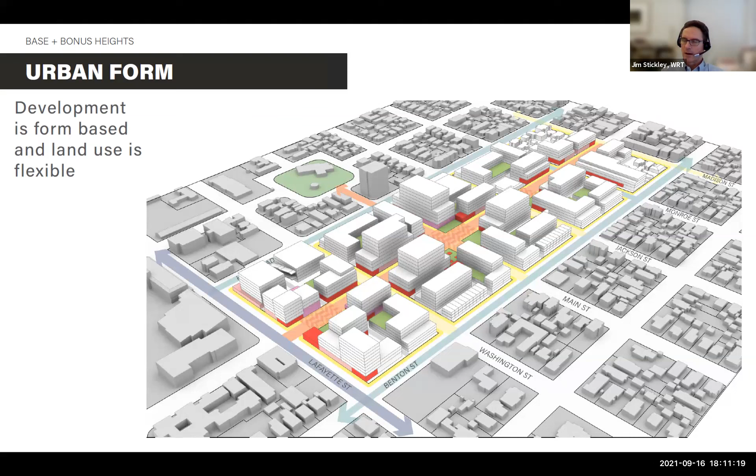So this diagram represents the height allowances that we all worked on together, made lots of refinements through our process, and approved in the session where everyone signed off on the framework plan. And as we looked at this in more detail and became familiar with the Surplus Lands Act, the desire to use density bonuses in a couple of different ways to get community benefits, but also looking at the state regulations of allowable density bonus on affordable housing, we tried to carefully look at these height allowances in the context of those influences. And so those are summarized briefly on this slide.

And so what we developed, if you go to the next slide, is a way to where we have a sort of a base height allowance that achieves the feasibility goals that we had all gone over together. So for the 2 different kinds of land uses, the housing and the office, which would be the predominant land uses. If you flip the slide, there are certain thresholds of feasibility.

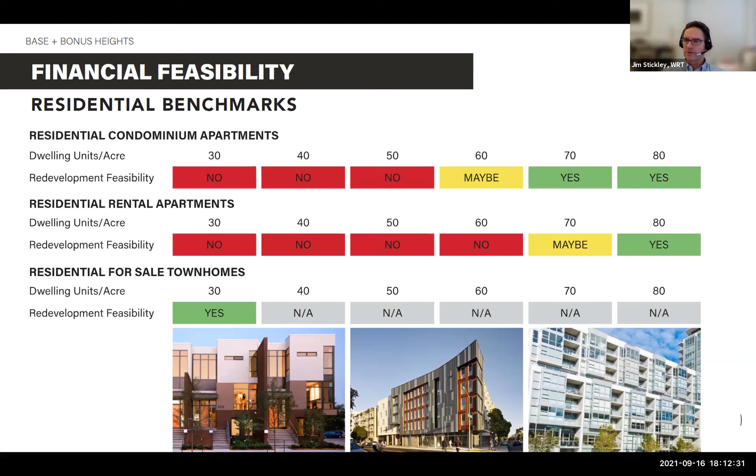And I think you remember these charts here that show where we start to get a maybe in feasibility and where we get stronger feasibility in the yes categories. So the feasibility really starts getting stronger on the residential side with 60 units to the acre, and then gets stronger as you go up to 70 and 80. And then in the next slide with office, the feasibility starts getting stronger at 4 and 5 FAR, and then gets significantly stronger above 5.

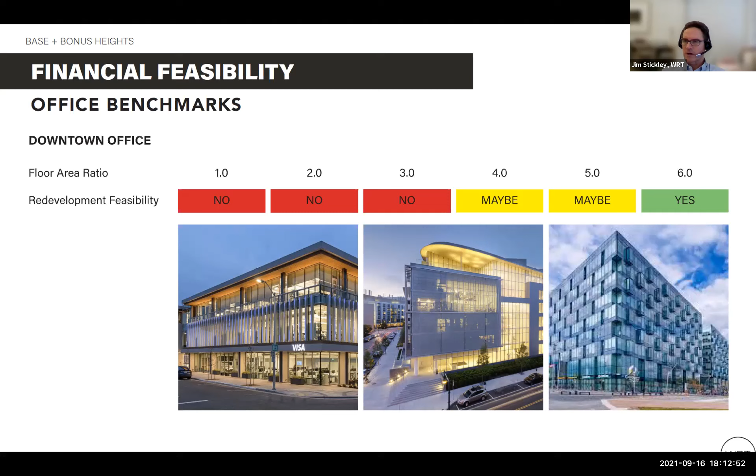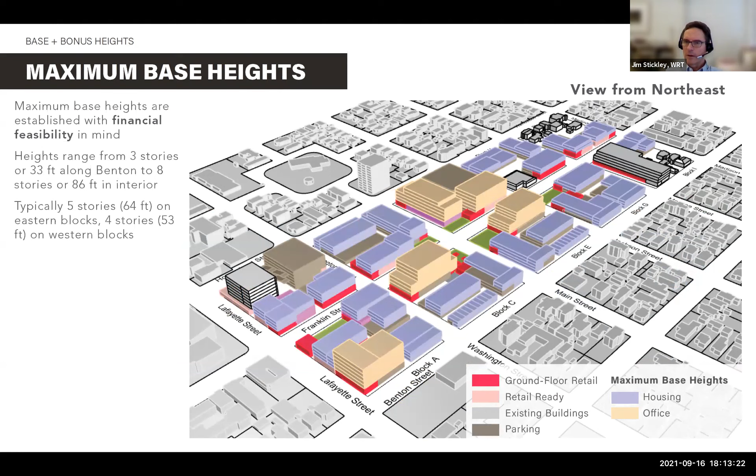So we're still trying to honor those thresholds in setting the base height, and that's what this diagram represents. So these are all shorter than what we all looked at a couple of months ago, but they represent the minimum height of a building that would still achieve the economic feasibility as analyzed by our economists. And then to that, we add additional levels that represent the bonus heights.

And so that's what this additional color is here. So you can see on most of the residential buildings, that's represented as the yellow floors. And again, our land use or our plan is going to be agnostic, as we've always said, to land use. So this is more a view of what may be probable land uses rather than land uses that are dictated by the plan. But in those areas where residential is probable, we're showing bonus heights of 3 additional floors, and that's in keeping with the state allowances for affordable housing projects. And it typically calculates out to 3 additional floors or an additional 80% of that building's residential unit yields. So that's what's represented by the yellow floors.

And then on the probable office buildings, which are the tan buildings, the bonus heights are represented by the darker terracotta color, which is generally depicted as 3 additional levels to those office buildings. So we were, I think, pretty happy with the way that this worked out, that we can address the allowance of bonus density and still keep it within the height limits that we all looked at together. And I think where it facilitates the building of affordable housing where that is likely to happen, so that might be on the city-owned parcels.

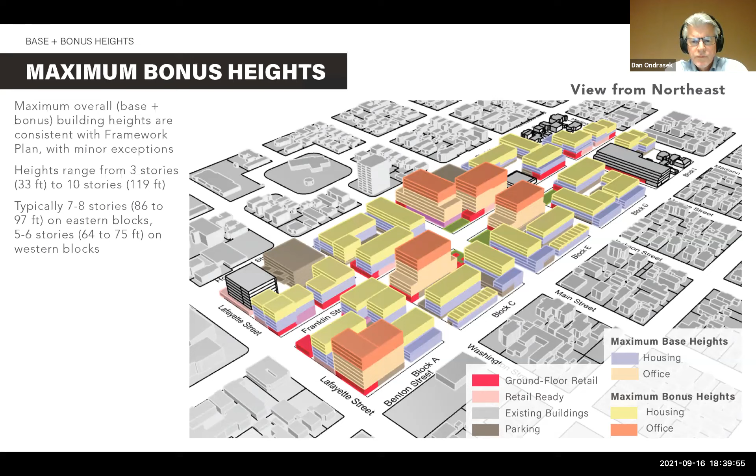Right, okay, that's the one that David showed the other night, the radial road pattern leading to downtown. That one would work well with that because it's visible from a lot of different angles. It could be a fairly slender thing, because you could have something quite tall there, and if it's fairly slender, it might shade your house, but for only 35 minutes, because the sun keeps moving.

So let's segue to the solar. I think these are... did someone have a question? I had one that you guys brought up earlier in the conversation, and that is that this is the precise plan bonuses, but the state bonus goes as well as this. They can stack, is that correct?

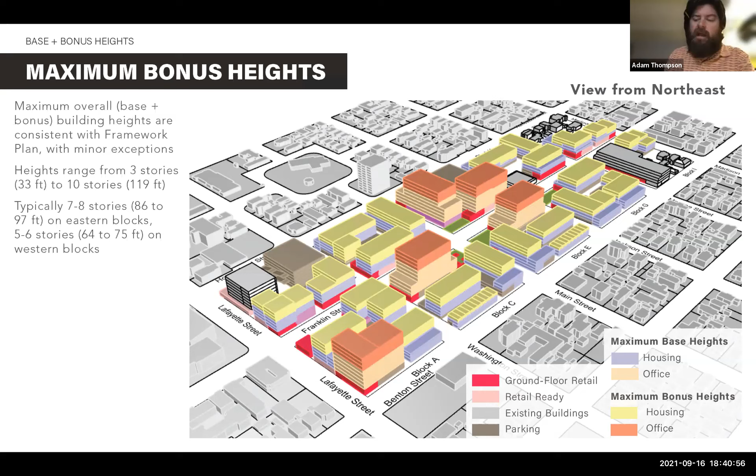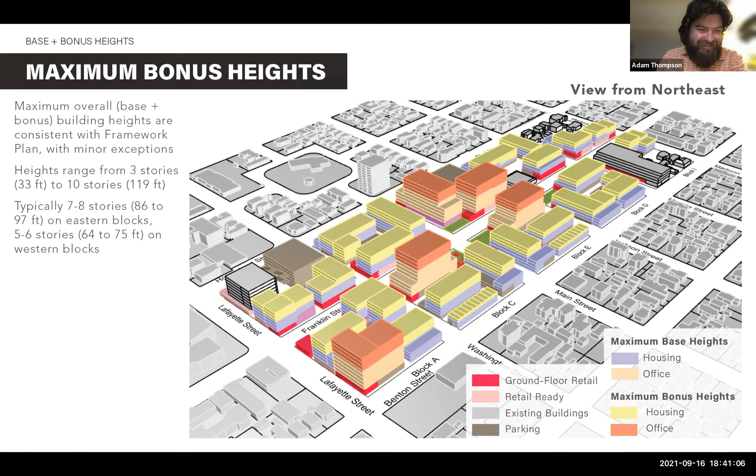Basically, I think the way these have worked in other cities, the developer gets to pick one or the other. I just wanted to make sure I heard it correctly, because I'm sure a lot of other people would want to make sure that there's no stacking. Of course. We tried to have everything fit within the heights that we all settled on.

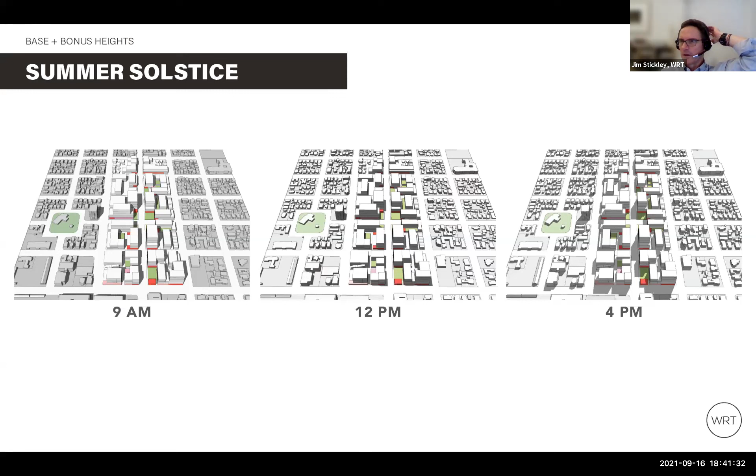This is with the scheme that we've all been looking at. And then the spring equinox, at 9 a.m. you start to get a tiny bit of shading down here at Benton and Lafayette, but otherwise we're in pretty good shape. That building we're shading is a one-story commercial building, so not a huge concern there.

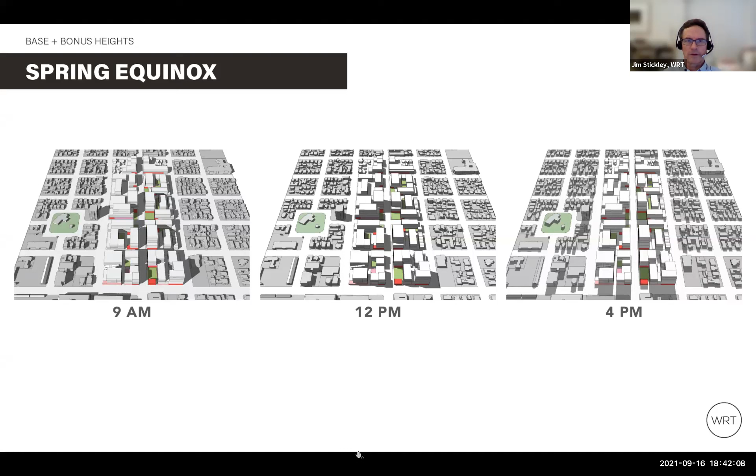Going to the next slide, this is the winter solstice. Here's where we start to have some issues. At 9 a.m. is where the problem is, so really from maybe 8 to 9 o'clock we are getting some shading along Benton, but not complete shading. You can see there are still some homes in the sun, their front yards might be shaded, but certain homes are shaded by these buildings.

It'd be important to understand from what time to what time. From 7 to 9, and for a period of maybe a couple of months on either side of December 21st. But on the other hand, they would generally be sunny from 9 in the morning to 4:30 in the afternoon, which is a lot of sun.

Some of this is going to depend on what the sensitivity is with the community, but you can see on this corner building at Benton and Lafayette, the shadow actually casts all the way to the next street, and that could be of concern. So we noted that. At 12 o'clock and 4 p.m. we're good to go, so it's really a morning problem, an early morning problem, exactly.

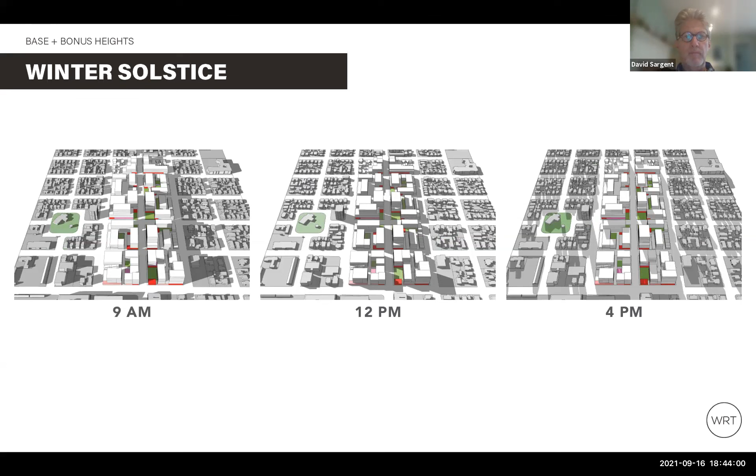So the culprits are this corner building that we talked about at Benton and Lafayette, but also these two taller buildings on the north side of Franklin, what we've been referring to as the office buildings. Both of those are casting shadow on some of the houses across Benton.

So we looked at that and looked at what height adjustments essentially for those three buildings. There's a little bit of an adjustment to one of the mid-block residential buildings, but I think it's one floor of adjustment, so pretty minor on that one.

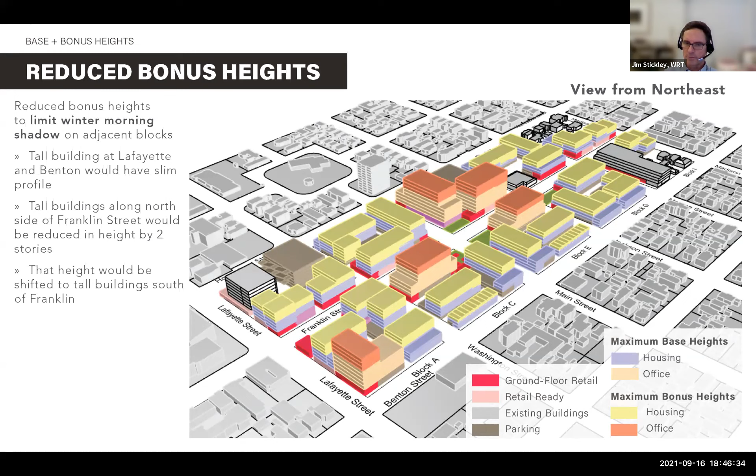So it's really those three tall buildings are the major changes. And then if you just flip a couple more times, Peter, on that mid-block residential, you can see that those also are just, and it's actually just one of them that's slightly adjusting.

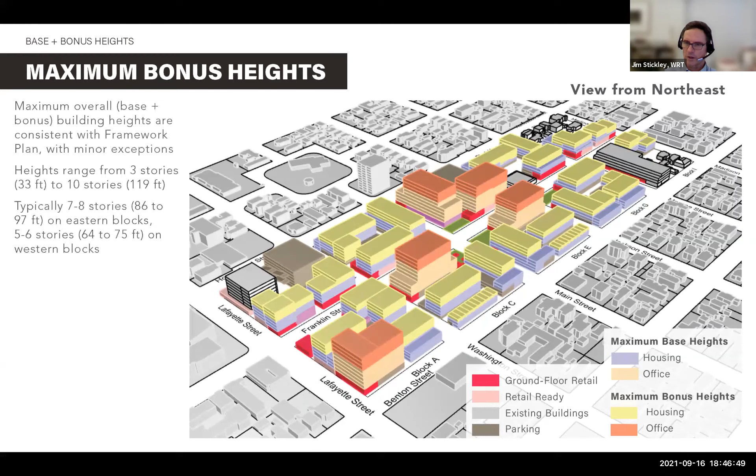And there's still some front yards shaded, but as David says, this is for a couple of hours in the morning during a couple of months in the dead of winter. So we don't want to overblow the problem, but we also want to make sure that we're not going to be presenting something that is going to be shocking to the neighbors.

So that's really our recommendation, is to make those changes. It does reduce the capacity of the plan some, not significantly. In the next section, we're going to talk about capacity, because we want to tell you about our approach to caps on certain land uses, and at the same time quantify the amount of capacity we're losing with these changes. But our general feeling is that it's still quite a robust plan in terms of the capacity we're providing, and that this is a relatively minor change, something that probably buys you some goodwill with the neighbors. So are there any questions on that before we move to the capacity portion?

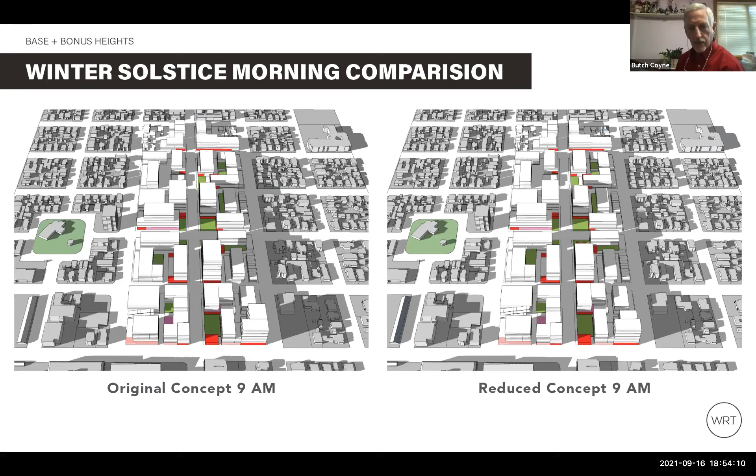Butch, did you have another comment? Yes, I did. This is kind of going off on a tangent, and maybe this isn't the appropriate time, but I had the opportunity when I was in Indianapolis to work with the rebuilding of the downtown there. They started playing with the height of buildings on the main drag. So my question is not having to do with the sun, but having to do with wind.

One of the issues is once the downtown was built in Indianapolis, it created substantial wind tunnels because additional height was added to the buildings. Is this anything we would need to be concerned about, especially on Franklin Street, with the way we create the tunnel the higher we go?

I don't know, it's a good question. It's not something that we've studied to any depth, but it's a great question. So we had the same issue in San Jose when we built the Rep Theater on the Paseo. The way we positioned it, we didn't do a wind study on it, and it created a wind tunnel on the Paseo next to the Hammer Theater, which is there too. So again, might be something we want to take a look at, because the last thing we want to do is create those wind tunnels at certain parts of the day.

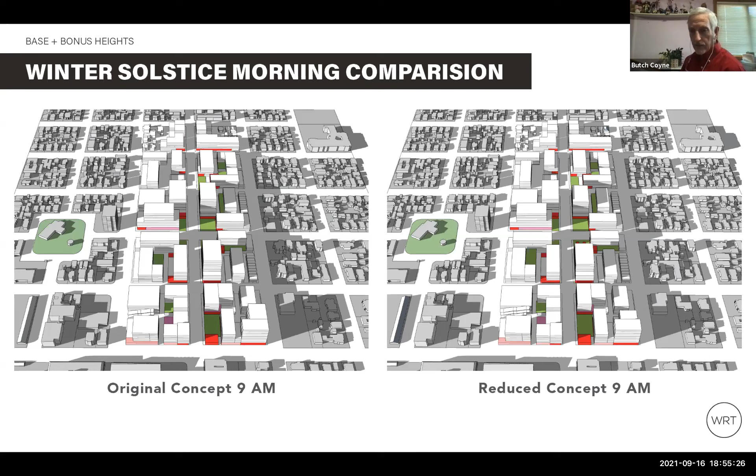We know how the wind picks up around 4 or 5 in the afternoon. Again, I have no expertise in it, but the taller we go with those buildings, what are we creating when it comes to wind patterns? Very good point, Butch. I think we do have some opportunity in the EIR process to look at wind effect. So that's a really good point, and something to pursue.

All right, great. Well, I don't... Tisha, is your hand up? Okay, no worries, sorry Jim. Okay, let's keep pushing on.

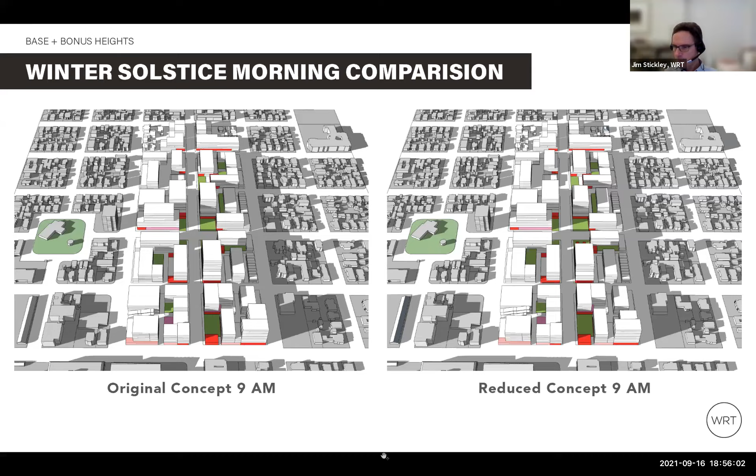I think we want to leave an hour if possible for the form-based code piece of this. So Peter, why don't you go ahead with this part?

Sure. So we were beginning to look at how much development this model enables, and how the plan should regulate that amount of development. Starting again with the assumptions we've looked at together numerous times, which underlie some of these development findings. Here we're comparing the original concept with this reduced concept, meaning reduced heights in certain locations in order to preserve solar access to those houses.

I want to first focus on just line by line, not so much comparison, but looking across the table. Looking at the original concept, the model we've looked at together would enable about 1.6 million square feet of development as a base, without any of the community benefits, and an additional 850,000 square feet of development were those bonuses to be realized. So total development capacity of about 2.4 to 2.5 million square feet.

Broken down by land use—and again, we don't want the plan to be dictating land use to this extent—but were the model to be developed, that would result in 884 units in the base, plus an additional 700 units of bonus, for a total of approximately 1,600 units.

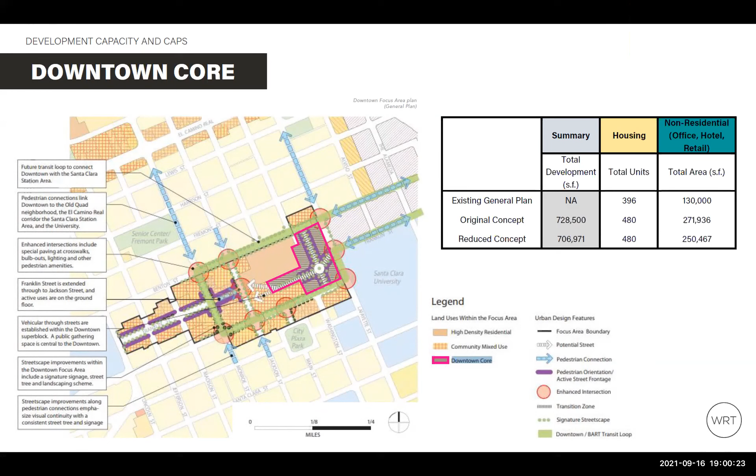Just a quick thing—it's not 100,000, it's 1 million. A million? Oh come on, that sounds better. That sounds more scary. 100,000 seemed really low to me. No, I'm sorry—how many parking spaces did you say? 2,900, so it's about a million. 350 per space. Oh, Jesus, I'm so sorry, thank you. Yeah, that seemed low to me. Power of 10, power of 10. Can you just, Peter... cars are big. Sorry.

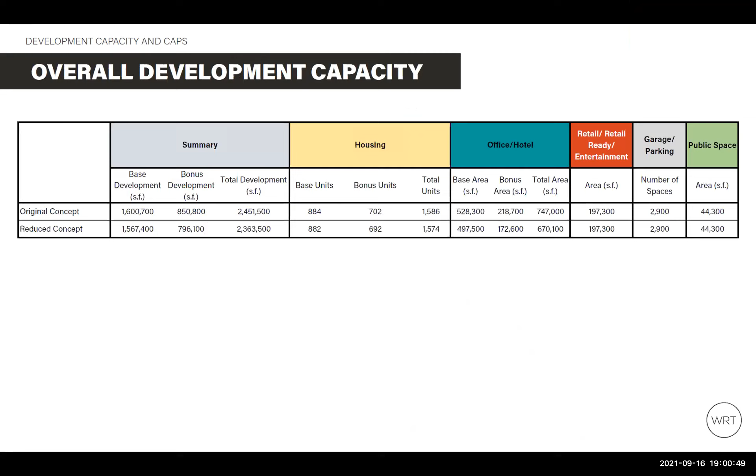Jump back real quick, Peter? So roughly 1/3 of the total developed space is parking. The general rule of thumb on office is that it's the same square footage of office surface area to office parking. If you imagine an office building in that volume, usually to park that, you would require the same volume building right next to it. Most people don't realize that, and it's quite a shocking comparison. If you're looking at 3 cars per 1,000, that's what it actually works out to be.

Now, our ratios are lower, as David said. We're using 2 spaces per 1,000 for the office because of transit proximity and sharing and a lot of other things. So our volume comparison would be less, but just as a general rule of thumb, that's what it is. It's shocking.

I just wanted to bring it up because for everybody who watches this video and the public as well. That's why we need transit right there. That's why we need it. It's right so down close to Benton. All you got to do is get to it.

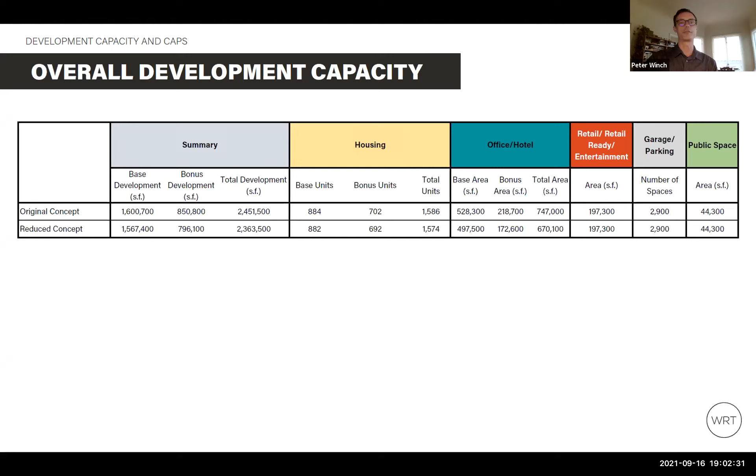I think the reduced concept, we would naturally assume a reduction in the parking to correspond with the reduction in office space as well. We didn't catch that, but it would. Good point. It's not going to make that much of a difference. Just a quick comparison, thank you Peter, appreciate it.

So the downtown core is a land use designation in the city's current general plan, outlined here in pink, and is this strange organism which takes in most of the city-owned properties on blocks A and B, and on block D. Actually, all of the city-owned property, as well as the property on the corner of Benton and Lafayette.

So the current general plan states that there's a capacity in that pink area for 130,000 square feet of non-residential development and 396 housing units. And our concept, our original concept with base and bonus would raise that to 480 units and about 270,000 square feet of non-residential development. And then the reduced concept would just reduce that because that hotel tower is more slim.

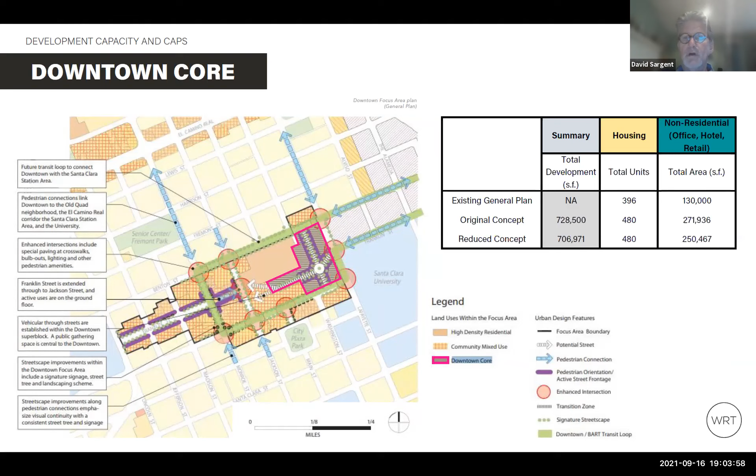We're losing about 20,000 square feet in that area. And if, as could happen, less office ends up being attracted to here, then it would just go to housing. So if the office dropped significantly, the housing could increase very significantly.

So that's a good segue to this idea of caps. Our proposal here is that the model that we've been working with should be considered the sort of housing maximum model. That this is, if we want a 24-hour, 7-day-a-week downtown that has a mixture of activity and uses, we wouldn't want much more housing than this. We'd want about this much non-residential development to be mixed in. So we're calling this the housing maximum.

And I think this is something that we should discuss together, because we haven't yet had a chance to discuss this. So that relative, sort of what is the right amount of elasticity between housing and office primary uses, I think is where we're at right now. And this also can be called the office minimum. Yes, and I think it would be better to call it office minimum.

Because the housing that you're mentioning, those 1,586 units, is based on an understanding of how many gross square feet of building would be devoted to housing. If the average unit size for apartments was 750 or 800 instead of 900, you'd have a lot more units. So this is a good point. And if you had a lot fewer townhouses, or if the townhouses were less than 2,000 square feet, you'd have a lot more units.

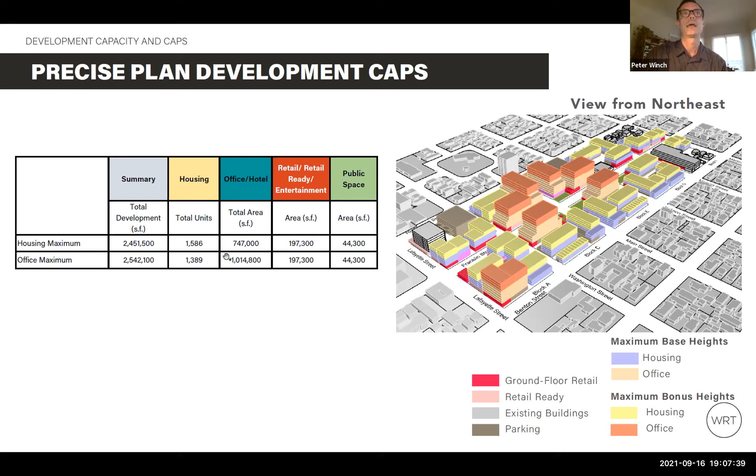So then we go to a second scenario where we're imagining we get a bit more office. Peter, just so everybody saw that change, flip back and forth. Everybody can see where we've added two office buildings. Now this would change the numbers a bit, so we get higher square footage in the office column and fewer housing units.

What we're suggesting is that the plan would set caps in multiple categories: a cap of overall development in this summary column, let's say about 2.5 million square feet. It would set a cap of square feet in the housing category, not units, corresponding to our housing maximum model. And it would set a cap of office square feet corresponding to the office maximum.

But you can see these two numbers aren't going to add up to the overall cap — that would be too much, so you can't get all of it. But you can max out one or the other, not both, while staying within the overall cap. That's a good way to approach it, and we'd also keep the ethic of not mandating where the buildings go. Just because we've modeled these two outcomes doesn't mean that's exactly where the buildings will land — it's just the right proportion.

We think somewhere in that range is the right mix of office, hotel, and housing. And if it turns out in 10 or 15 years that the market is just stubborn, that's why plans can be amended. If it turns out all we're getting is residential, they reach the residential cap, there's no office, and that's not what we want to have happen, but you don't want the rest of it to just stay vacant.

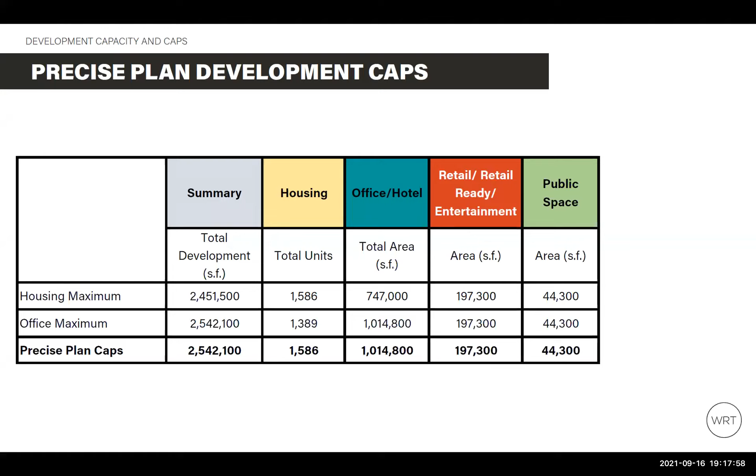Anna: Hi guys, there's a couple trends going on recently that may impact the attraction for office in our downtown. One is remote work—people are choosing to work for companies who allow them to work out of state or remotely, which may make office look less attractive. The other thing happening right now is a tax on headcount. I know Google got hit pretty hard in Mountain View with this, in the millions of dollars. So companies thinking about office space may now be trying to reduce headcount as well. All of this is happening post-COVID, so it may make office look less attractive downtown for other companies or developers.

Yeah, I wouldn't want to be an office developer this year. No. Atisha, is your hand still up? We're good? Sorry, yep, no problem. All right, I think we can continue on, Peter.

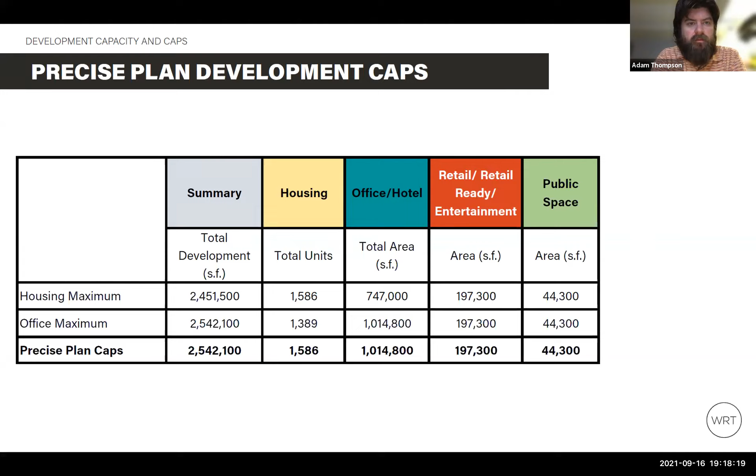Okay, and Jim? So the last topic, I think, is just one slide here, acknowledging that we haven't looked closely at these single-family houses that exist on the westernmost blocks in our district. We haven't given them a lot of attention as a group. So I think we need to discuss what our stance is, what the plan's stance is toward these houses.

I think what the model is doing is expressing an intention that those buildings can remain—that the plan includes development standards and perhaps incentives that work toward those buildings remaining. But I think that could be done in a variety of ways. One way could be to enable development at the same scale we'd be enabling along Benton, which is townhome scale designed to step down to neighboring buildings, but to create incentives for that development capacity to be used instead on neighboring sites.

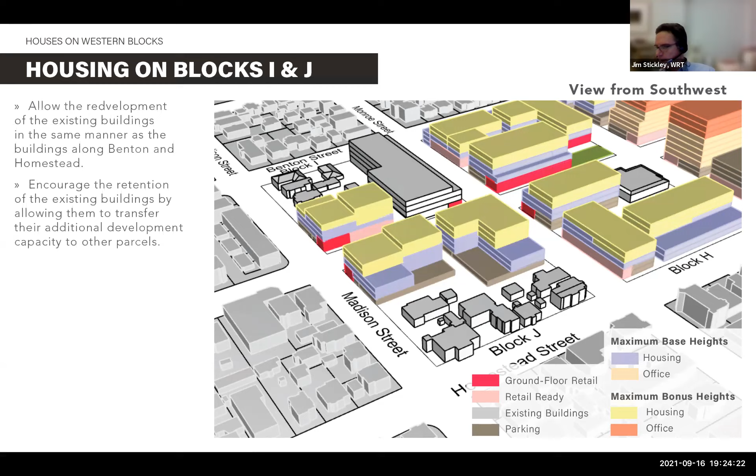Okay, we'll give some more thought to that, but that's helpful. That's sort of the general spirit of where we want to go with that area. Great, so I think that ends the first piece.

David, do you want to take over the share screen? Before you do that, I just wanted to let the task force know that we are taking this plan to the council on September 28th for their acceptance. That will include the development capacities, which will set what we're going to use to start our environmental impact report and move forward through the process. So again, this will be going on the 28th of September to council for their acceptance.

And before it goes to them, can we clarify the business about the square footage versus dwelling unit counts? Yes, great, thank you.

Leslie, to reiterate what we talked about, if everybody feels comfortable with these height adjustments to address the solar, we wouldn't really raise that as an issue with council. We would simply present the plan that we and the task force have worked and settled on. That's sort of the approach we talked about, rather than saying here's the plan that we developed, and then here's the height adjustments that we made later. I don't think that level of detail is needed. Just present the reduced heights plan as the plan.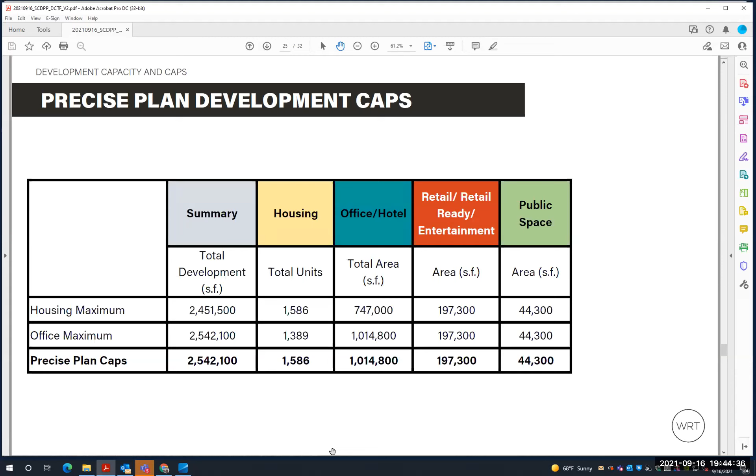Are we going to do a lot of redevelopment? The historic nature of the downtown and some of the homes within it, including the Cole House on the corner of Homestead and Monroe, are really important to the community. Preserving both the historic context of the homes and the homes themselves are important. So what is it about this plan that actually guarantees protections for historic homes, both within the downtown plan itself and the homes surrounding the downtown, where we do have plenty of those? Thank you.

Thank you, Jonathan. So can we answer that now? I think, just briefly, this plan focuses on these specific blocks. So if there need to be mechanisms to protect historic fabric in surrounding blocks, that would need to be the subject of another plan or a general plan amendment. I think this plan can only affect the blocks that are within this plan area.

With regard to the historic homes within this plan area, the ones we're seeing on Block I and J, I think the spirit of the question is exactly what we were talking about before—how do we place incentives in the plan that would encourage these homes to be retained as part of the fabric, and allow them to transfer their development rights to other parts of downtown where we want that density.

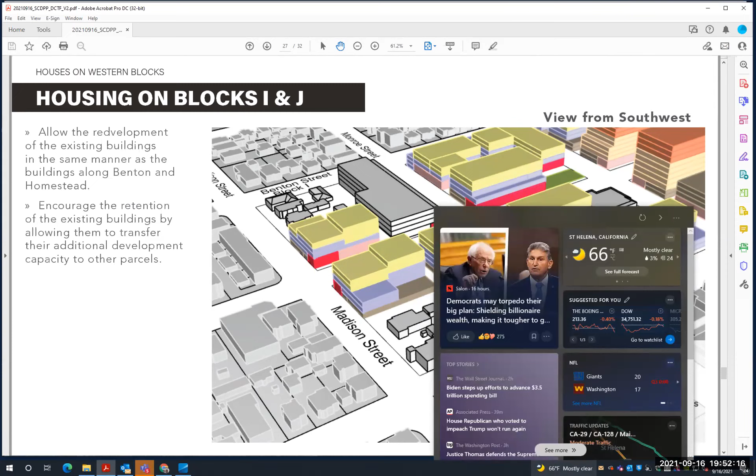I agree. I think the whole point of the form-based code was, well, what was intriguing for me, especially being an HLC person, is that we can put that language in there and it can be strong. And so that's what I'm banking on with this form-based code, those levels of protection. I heard that at the joint committee meeting, so I'm a believer, and I really want that included in this whole form-based code. That's why I'd buy in for that reason alone.

So I guess, WRT, I'd like to see what we can do. We do have a historical preservation ordinance, but it doesn't have a lot of teeth. And so I think, for the post office and these groupings of housing, it's not a large area of the 10 blocks, but I really do think it adds value and character and will be sorely missed if we just plow it over.

Good, this was very helpful. Yeah, really good comments. Chelsea, there's one hand raised for public comment. Yeah, we should go back to the public comments. Sorry, we kind of went off with Jonathan's comments. Mary Grizzle, go ahead, Mary.

My question is also on Block J regarding the grouping of houses. Are we talking about putting on rules or regulations that will prevent those homes from ever being sold? Can't do that, no, not being sold, they can't be sold. No, no, we can't tell somebody... you can't regulate somebody's ability to transfer a real estate asset.

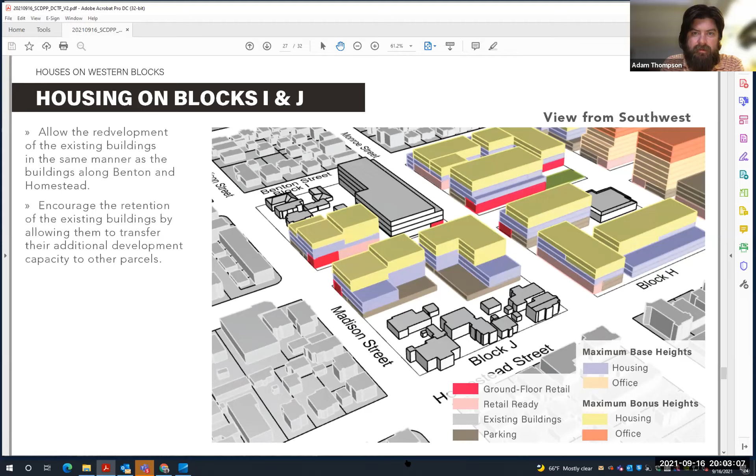I guess we'll move on to—well, I lost it, I guess I gotta find it now. We do have item 2.

Item 2, update—Leslie, I'm gonna drop off now. Thank you, Tisha. Thanks, guys. Good luck, I'll be watching as much as I can next week. Congratulations and all the best. Congratulations, Tisha, good luck. Bye, see you, Tisha. Do I need to be excused or something? Somewhat—no, but I will note that you've left the meeting at 8:03. Okay, bye, bye, bye Tisha.

Item number 2 on the agenda this evening is an update on the release of the online community survey. This one's mine—it's a quick one. I sent the draft to the task force this week to take a final look at. The task force had commented on this a number of months ago, and we're finally ready to put it out. Most of the content is based off your meeting in June, and it will go out early next week to the community, up for about 3 weeks, to get responses on that placemaking content as well as our preferred land use plan. So I wanted to put it out there for the task force if there are any comments or questions.

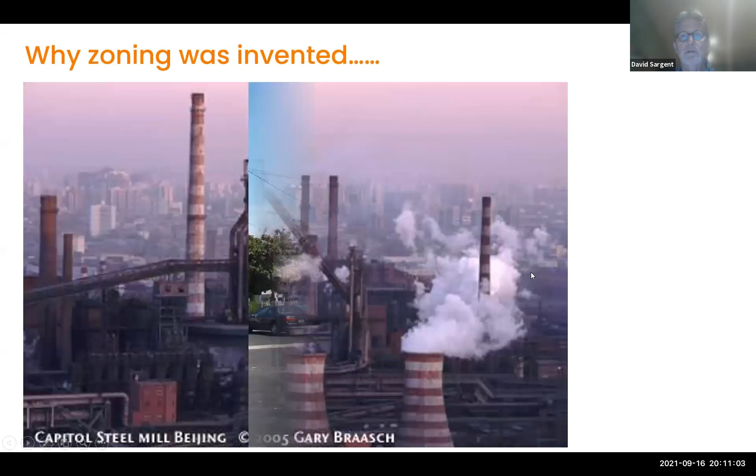So the reason we have zoning is to prevent grossly dissimilar uses from being next to each other. That's why it was first put in place. The typical outcomes that most zoning and plan development work toward are usually used as a recipe for regulating low density, auto-dependent suburban development, such as what our state has seen mostly for the last 70 years or so.

The primary emphasis of conventional zoning is separating dissimilar land uses, so in order to avoid land use conflicts, we put housing miles away from jobs, limit density, and spread things thinly over a lot of land. Because everybody has to drive everywhere, you have to make sure there's a lot of parking. There's not much connection between land use and urban form and design. When you're making a downtown, as we've all been talking about for several years, the starting point is really what kind of a place, what kind of spaces, what kind of environment for people are you making? And that isn't what conventional zoning does.

Regulating by FAR and DUA delivers unpredictable outcomes. We've already talked about that a little bit, and I have a simple graphic that'll help illustrate that more. A lot of zoning regulations just limit the amount of development by how many dwelling units you can have on an acre of land, and how many square feet of building you can have on an acre of land. But typical zoning doesn't say anything about where on the land you put that, except maybe set it back some, or how tall, or what shape it should be, how it should face the public spaces, which in a downtown are the most important things.

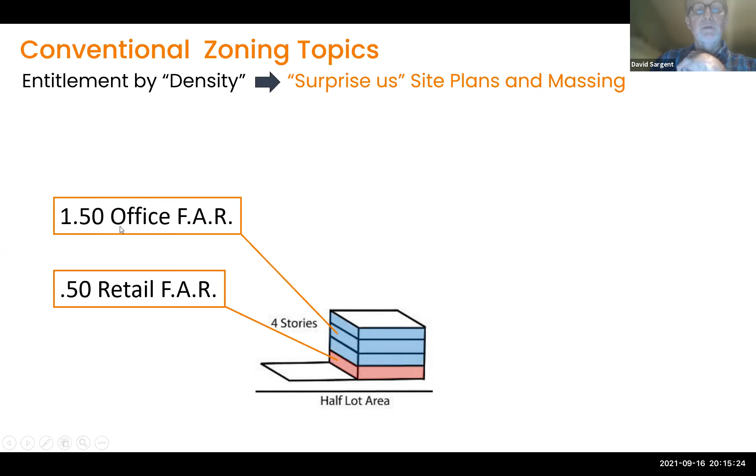You'd have a 0.5 retail FAR. If the rest of the building was office, you'd have a 1.5. But if the upstairs was larger apartments, you might have 40 DUA. If it was smaller apartments, the exact same building would be 70 DUA. That's why I'm strongly suggesting that the caps, even the targets, but certainly the caps, not be expressed in DUA.

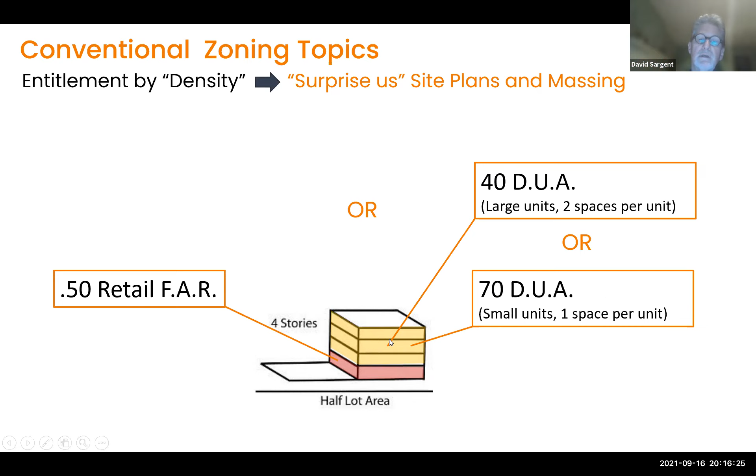It might turn out that in order to serve a student population, for instance, or population of younger families and perhaps older couples who have retired or just want to live, or their kids have grown up and moved away, so they want to live in a smaller dwelling in an amenity-rich environment like your downtown will be, you might actually get more units and a higher DUA within the same volume that would actually be a very good match with the environment, and perhaps ride transit more than people in larger units would, etc.

The other key thing about form-based codes is they can say that the ground floor needs to be designed thusly, and the uses on the ground floor can be this range of uses, and the uses on the upper floors can be housing or could be office, as opposed to the multifamily housing that we see so much of around the state, where the whole ground floor is just parking with a dead thing, and then housing stacked on top of it. So in conventional zoning, it tends to have use areas that are connected by big streets that people drive back and forth between where they live and where they work, or where they shop.

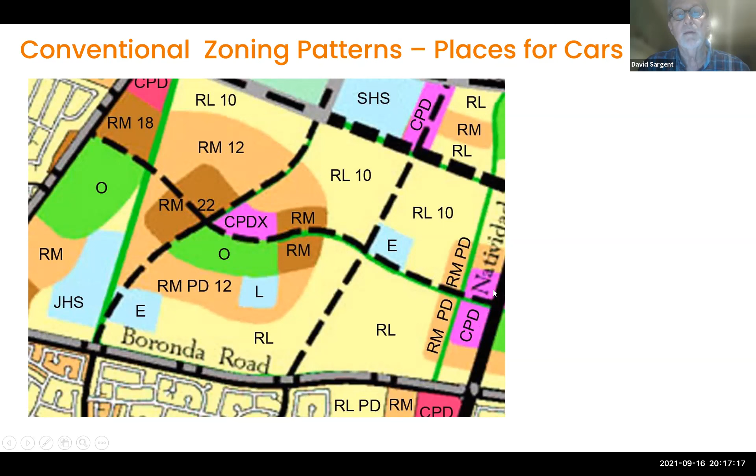It generates environments that end up looking pretty much like places for cars, whereas downtowns are places for people.

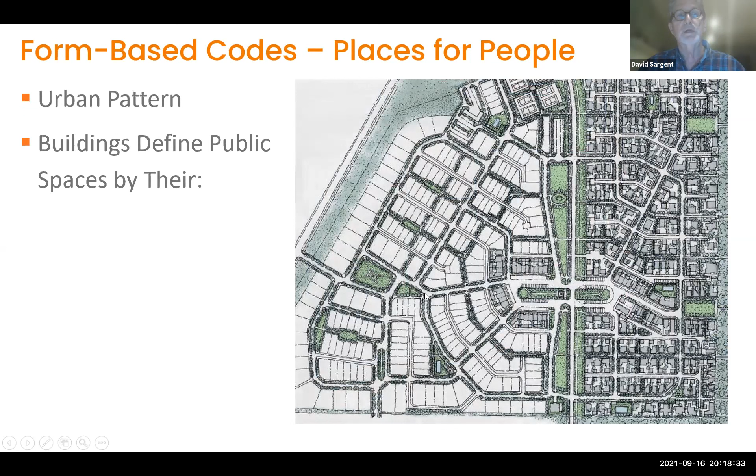So in the form-based codes, we talk about the urban pattern. Here, the precise plan is very much talking about the urban pattern. It's setting the block structure, making sure the public spaces work for not only cars, but pedestrians and bicycles, ensuring they're pleasant, habitable, livable public spaces, not just places to drive back and forth. The buildings define those spaces by their placement on the lot, their height, their massing and form, by the type of building — in this case, live-work buildings we built almost 20 years ago that have been performing very well ever since.

With ground floor flexible uses that could be part of what Adam was talking about, the ground floor could be used as part of the residence if you didn't want to operate a business, or it can be a place to operate a business. Their frontages are also designed to welcome pedestrians with porches, so you can sit out there and chat with your neighbors as they go by. And in some cases, there's a style or characteristic to the architecture.

Another characteristic that form-based codes normally center on is that open spaces, other than streets, aren't just so many acres you had to provide, but very specifically designed outdoor rooms related in their design, function, and purpose to the surrounding uses — providing a community activity outdoor room enlivened by and served by the surrounding uses.

This is a beautiful illustration our friend Steve Price made, illustrating an intersection of two big streets with a lot of apartments. Thought of differently, from the standpoint of the nature of the space, it could have activated ground floors, pedestrian crossings, active corners, and landscape that helps define comfortable shaded walkways for people. It's really about starting with the space rather than starting with the buildings as objects.

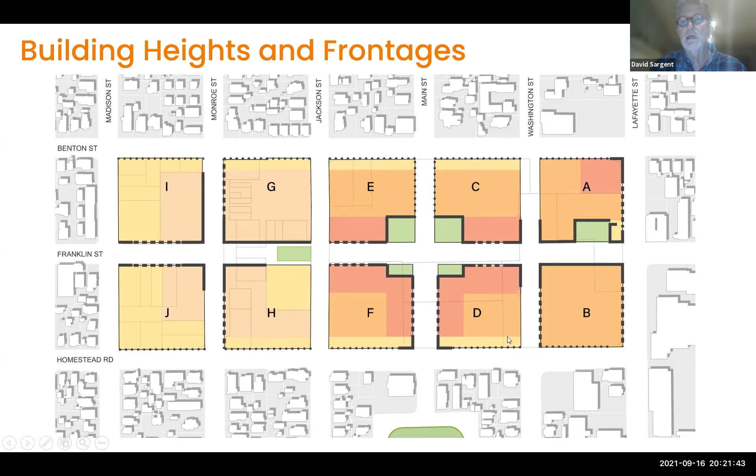Some of these others would be conceived of as retail ready — I'll show you a diagram of that in a minute. Basically, if initially there isn't enough retail to fill them all with successful businesses, they'd be designed in a way that could be converted to that use later without major reworking of the building.

And then, of course, the model we've been looking at — the role of the code with respect to these spaces is to make sure the design of this street, which WRT and we will be collaborating on, and the way the buildings face it, makes it a space that is both connecting and transitioning between the houses on one side and the new buildings on the other.

Same on Homestead. Clearly Lafayette and Monroe are incredibly important streets that need to look, feel, and operate like a downtown, very crossable by pedestrians from the university and the neighborhoods between these blocks on the south. But they're incredibly important for feeding customers and money, pumping it in and out of this downtown. And of course both Monroe, Benton, and Franklin are critically important, connecting the downtown up to the BART, Caltrain, Amtrak, and the large mixed-use development happening up against that, and El Camino Real, which has been underperforming for a very long time in that stretch.

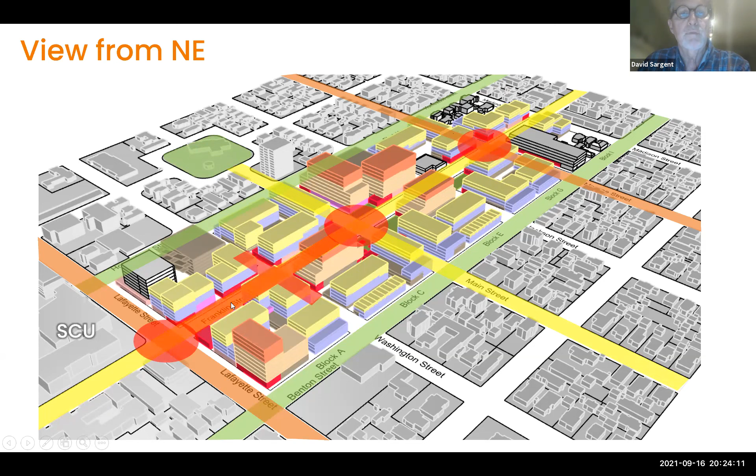And then these intersections of Lafayette and Main and Monroe are going to need to be thought of very carefully in terms of how the buildings make those spaces, and of course how the buildings make this core space. So it'll have a huge amount to do with the nature of the frontages and the massing, which I'll show you a little bit about as we finish this little spiel here, and then I want to hear from you folks.

As we've discussed before, this diagram that WRT made is so beautiful. It emphasizes once again the importance of plugging this, basically plugging, if you think of this as like a printed circuit board. This is a new CPU here, and it needs to be plugged into the circuit board so that it connects to the whole rest of the circuit here.

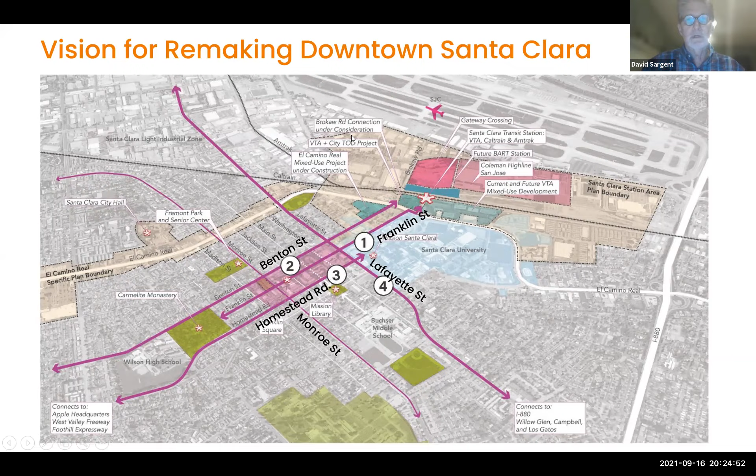And this diagram shows how the historic radiating streets were built out through the plum orchards. Well, first there was the mission, then there was the university, then there was the town, and the old quad. And that was all that was out here except trees, for a long, long time. So they just ran roads out from it into the orchards.

And that structure could be now taken advantage of by perhaps putting some landmarks where you can see them as you're coming into town, so that people realize that, once again, the heart, she's beating.

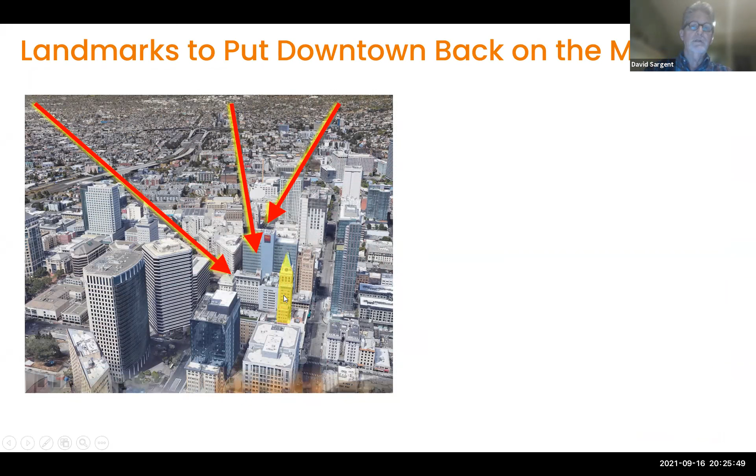I love Oakland a lot. The example I showed before was you've got San Pablo, Broadway and Telegraph coming in to the center where you can see the Tribune Tower. And you've also got the beautiful example of the roof sign on the Grand Lake Theater that you can see from all around the lake.

So, slender and/or illuminated elements rising from a couple key points here, whether it might be this corner where the existing building is, this corner, which actually terminates the views of a couple of streets coming into town, this corner that we've talked about so much already, even this corner—not that this building should be very high, but maybe there would be something visible on it—could really start to put your little downtown back on the map for everybody.

And then I put this slide in here just so we could talk about the importance of scaling down from the core down toward the neighborhood. I think we've covered that topic, so I won't say any more about it right now.

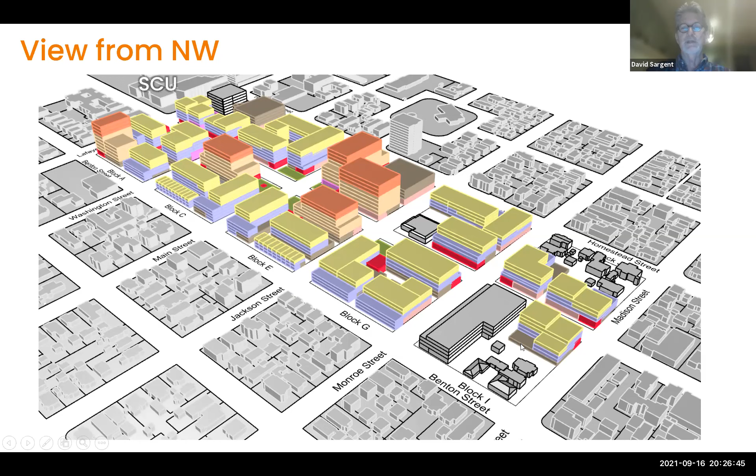So the elements that are regulated by a form-based code—basically most zoning just covers land use, density, setbacks and heights. But the form-based code discusses the building placement and how the buildings are massed, not just how big they are, how big they look.

Building heights, the nature of frontages—those are the main topics that I'm going to show you. And then there's a lot of other important ones: the extent to which on-site open space, whether it's courtyards on the ground or terraces in the air. Parking, of course, allowed uses, signage.

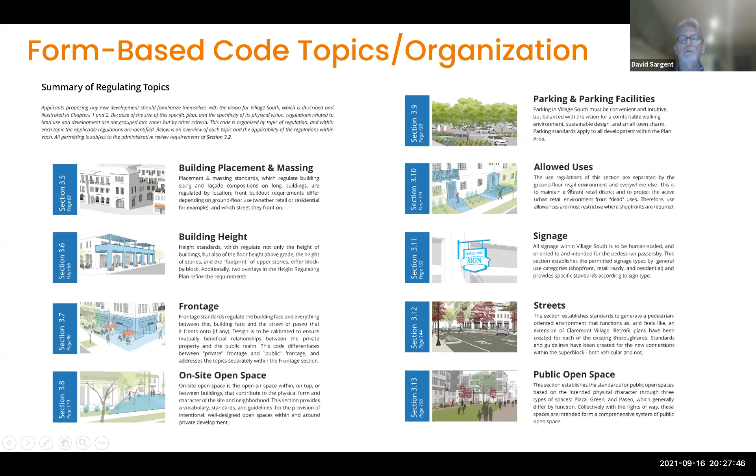And the street designs and public open space are going to be covered in the precise plan, really, not in the code. So the mechanics include parking and uses, and they're covered in great detail. Some people think that form-based codes don't regulate use. Of course they do—they just talk about a lot of topics in addition to use.

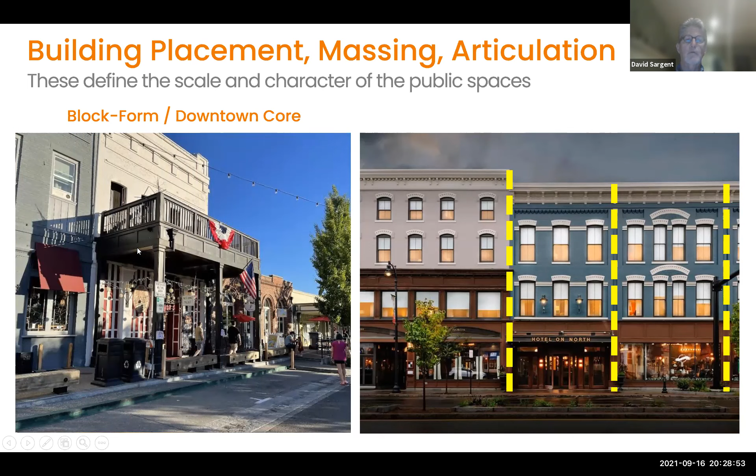Also, you can generate scale with projecting elements over the sidewalks, whether they're galleries or arcades.

Then there's the matter of house form massing, which is certainly a strategy we would recommend as we fade the neighborhood toward the south end of the property. This is actually a 3-story building with underground parking, but it looks pretty compatible with the bungalows across the street, because it has an eave line that's a low 2-story scale, and the 3rd floor is disguised as roof with dormers, a technique that's been around for hundreds and hundreds of years.

So if you're near houses, you can mass it this way—this is nothing else but an apartment building. That's an apartment building too, but this one goes well with the buildings of the downtown core, and this one goes well with the houses across the street.

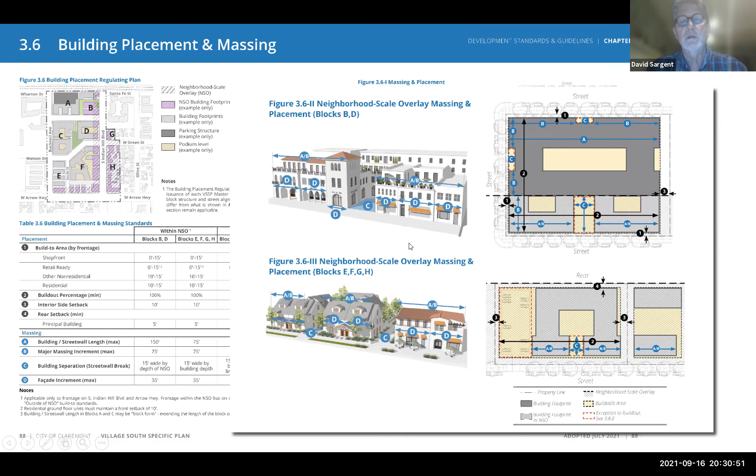So we define, for one specific situation, along edges where older, smaller buildings are present, horizontal massing and building articulation, facade increments. This is just a 1-2 story building, and we don't advocate the Disneyland approach of making it look like a whole bunch of buildings built 600 years ago. But just by the way the windows, entry doors, and shop front openings are organized, you can give buildings a scale that conveys horizontal and vertical increments relating to buildings that were there before, or buildings still there across the street.

Frontages are probably the most important single topic. Frontages are what you walk past. Frontages are what you walk in and out of. Frontages are what you perceive when you're not tipping your head back looking up to see how tall the buildings are—they're the walls of these outdoor rooms that people walk past all the time and reach out and touch.

So a lot of the code focuses on making shop fronts tall enough to bring light and air into the space and provide beautiful indoor spaces for restaurants and shops, with very clear glass so you can see what you're walking past, and usually some kind of shading over the top so the glare of the sun doesn't leave you looking at your own reflection, like a pigeon.

There's certainly the possibility in our benign California climates of having shop fronts that open right up to make indoor-outdoor space. In all cases, a lot of the intention is to blur the line between indoor and outdoor, so that as you're walking past, you see in, and when you're in the space, you see people walking past. This takes it to the next level with openable shop fronts, letting people do outdoor dining indoors, and allowing life to spill out onto the sidewalk, making the sidewalk in front and the room inside really all part of the public space that you can activate.

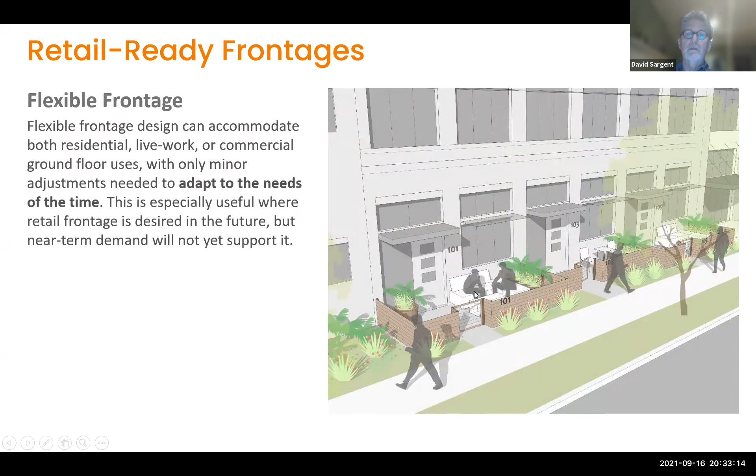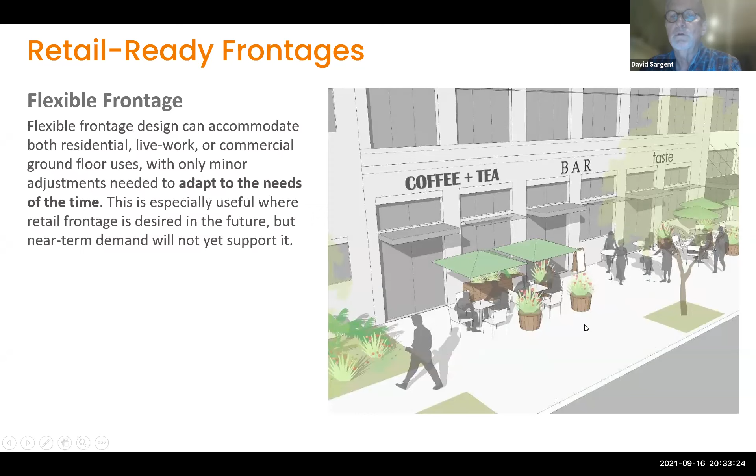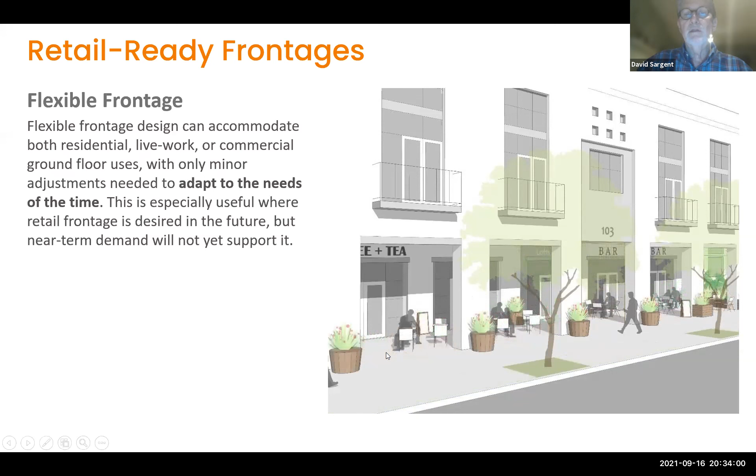At some point, if the market develops to where there's more demand for commercial and restaurant uses, you just take those little fences out and boom, you've got stores. This is one of the live-work frontages in Hercules that we did back in the aughts. Some were initially occupied as just part of the residence, but a lot of small businesses have moved in here, and now the larger mixed-use center is finally under construction a couple of blocks away. Here's another way to do it with an arcade—you put planters here, then take them out and boom, you've got shops.

And the way we code these is—so this is the Claremont plan we did—on this plan we can highlight those frontages that Jim and his team have been coloring red all this time.

And certain ones of those, the only uses permitted would be true retail commercial. You could also allow office, which would be better than an empty space. Some of these purplish colors indicate where the retail-ready, convertible frontages we talked about would be incentivized. So even if they're housing for the first 5, 10, or 15 years, they could be converted to commercial frontages without serious demolition of the buildings.

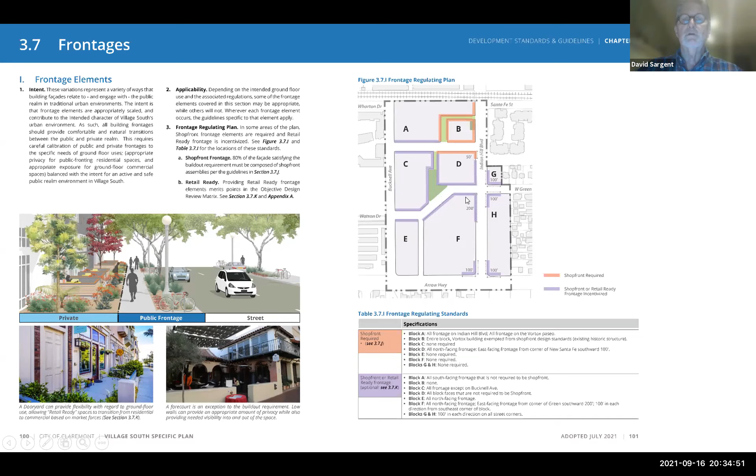For the frontage, we'll code we'll probably advance these further for you, but we just have shop fronts, which are the normal big windows with some shading device. Recessed shop fronts are an intriguing sort where you can get an outdoor dining space under roof, sort of in the ante room leading into the restaurant.

And then you could have arcades that come out over the sidewalk where you actually have upper floors. Now this will be a question we'll need to talk about, whether or where we might want this. This can allow the building face to come out very close to the back of curb, which in some contexts is useful to narrow the space of the street. But if these buildings are going to be very tall, maybe you don't want to both narrow it this way and narrow it by making buildings taller.

Galleries would be like the one I showed you from Folsom, or it could be more modern like this, where it's basically a roofed sidewalk.

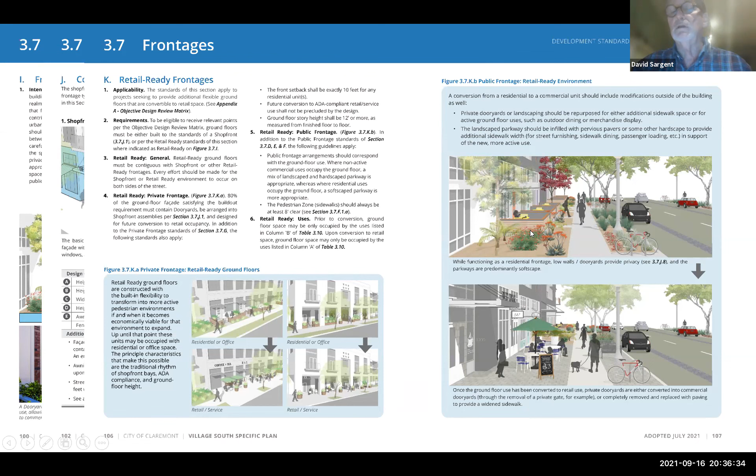Then we code the different retail-ready types, and the total frontage includes the public frontage, which is the sidewalk, the landscape strip, and the parking lane. We call that the public frontage, and that's mostly defined in the plan by Jim and his team. The code will define mostly from the sidewalk on back, where there's a setback, or just the building facade if there is no setback. But they have to be tightly coordinated, and that's the value of working on the plan and the code at the same time.

Then there's different residential frontage types. There's the old-fashioned stoops that require a vertical displacement that doesn't accommodate wheelchair accessibility. So it works better for single family types than for multifamily housing types.

But you can also have a corridor that additionally accesses the unit. A lot of buildings would just have a lobby and apartments, ideally with windowsills above eye level as you're walking along the street. So you'd go into the lobby and then probably up a few stairs or a ramp to a floor level that was a bit above the street to provide an appropriate degree of privacy for the ground floor residents.

And then we'd code different residential frontage variations, porches, stoops, terraces, etc. That's it, I didn't want to go long on that.

The most important topics are the massing and facade articulation, which are basically the walls of the outdoor room that will be Franklin Street, that will be the central square, that will be any of your streets. Then the nature of the frontages, what are you walking past, and a key element of both the frontages and facade articulation is that there be windows overlooking the streets to give eyes on the street, as Jane Jacobs always said. That's what makes this place safe, secure, comfortable 18-20 hours a day—the fact that there's people in the residences, people in the businesses, people in the offices looking out over the street so that the place feels lived in all the time.

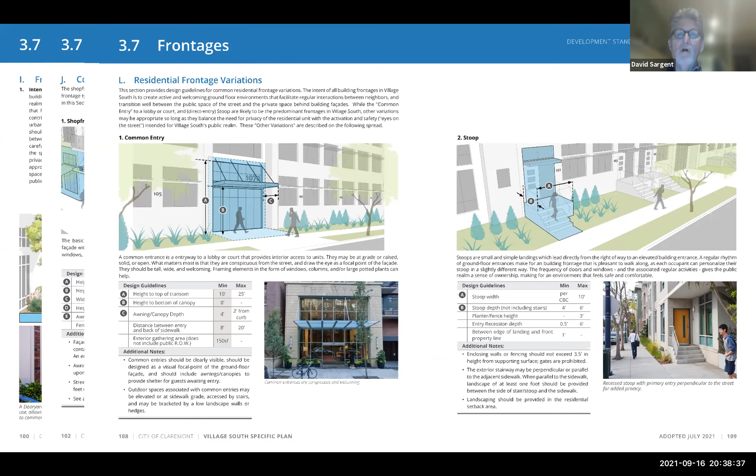Okay, anyway, so I'd love to hear any questions or thoughts you guys have about what's most important to make sure we cover.

So I think that's just really exciting to think about, how language plays out along Franklin and turns some of the corners. As we start developing the code, we'll show you a lot more examples. There are some beautiful examples in Celebration, Florida, near the lake, of exactly what you just said - tall arcades with terraces or porches on top, which activates the street in a whole other way. You've got a whole other layer of life going on up there, looking down.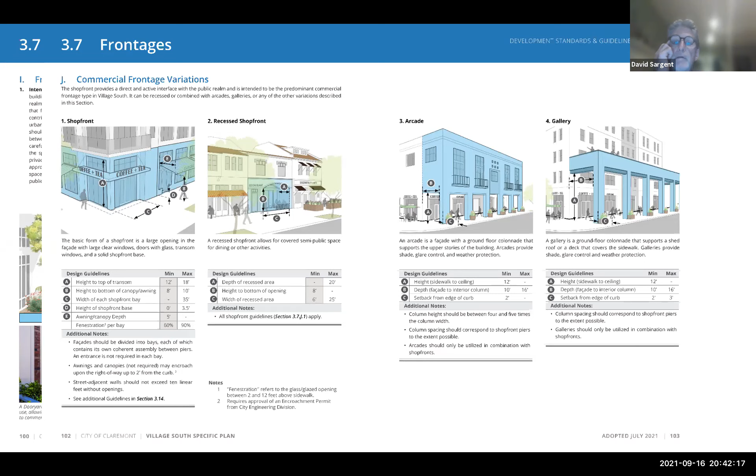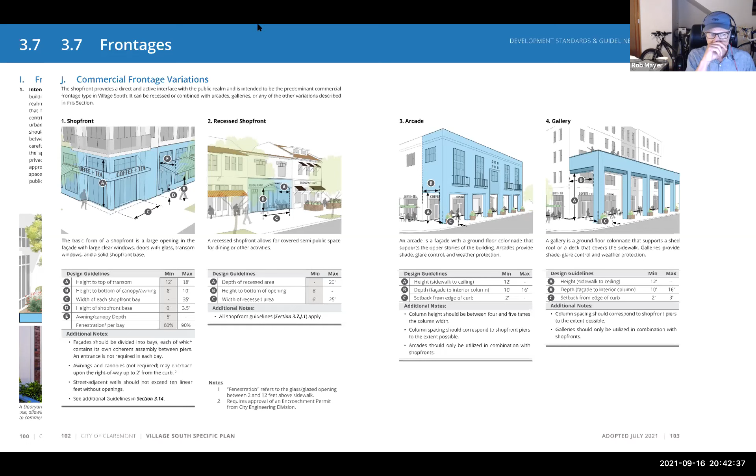The first one was that you had a block form slide - could you bring that one up? With more of the podium on the left and the more traditional downtown block fronts on the right. The issue I have with that left slide, I'm just going to tell you, makes me cringe - because it makes us all cringe. Podium construction is everything being built right now, and it loses that soul of the 25-foot modularity that you guys had there earlier, but I don't know where it went.

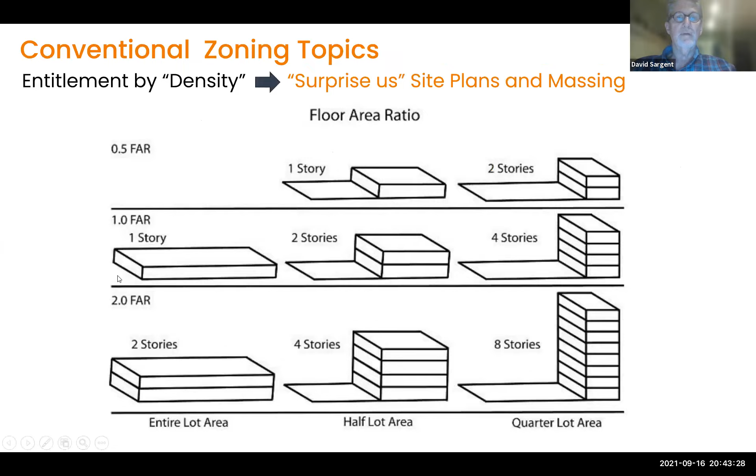Is this it? No, it's the one with the horizontal yellow podium. Oh, I know where that is now - it's when I started talking about massing. My fear about it is that's exactly what most developers are doing now with the 5-over-2 or sometimes 6-over-2 podium construction. So I struggle with that, because that yellow line - I don't want our downtown to feel like podiums, I want it to feel like the right side.

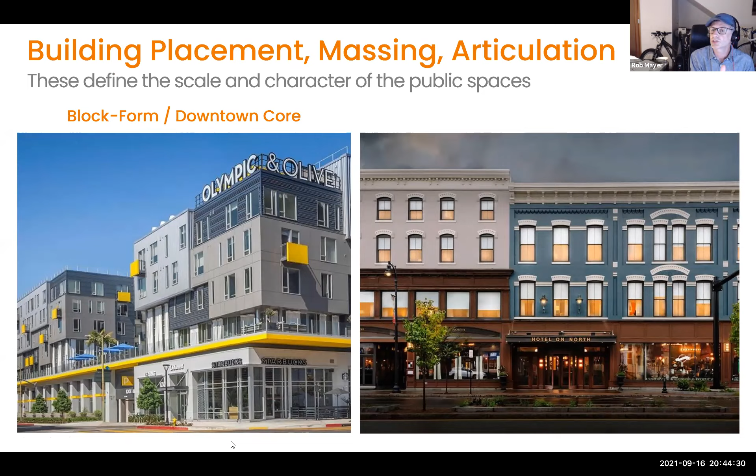So no, we agree completely. Thank you. I'm not saying you can't have a yellow band for that first couple buildings on the corner, broken up like a canopy or some strong element, but the fact that it carries down the whole block and they just articulate above - I might feel differently about it, David, if that banding was up another 2 stories, so it looked like a 3-story frontage of an old town that they then added on top of, like a 2/3 split or something.

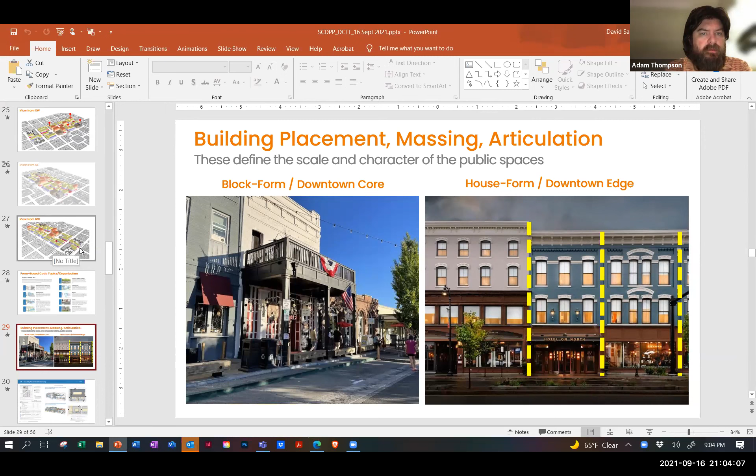The other piece I'd mentioned earlier was about the wind issue downtown and checking it. When we designed the Hammer Theater in downtown San Jose on the Paseo, the whole front was meant to open — the lobby would open out and spill onto the Paseo. Once we built it, the wind was too strong, and that building has never opened the front panels because the wind is just too strong. So I like the idea of openness, the open frontage, but wind and sun were a big factor. A beautiful element that would've been perfect for a theater — opening the lobby up, spilling out for intermission — can't be used at all because of the wind factor that was never considered.

Well, yeah, Jim, let's see how we can leverage the CEQA scope to look at that. That's a terribly important thing.

Actually, we're redesigning Main Street in Ventura right now to make it into a programmable, closable space that can accommodate a lot of outdoor dining and then be closed off with bollards, a bit like the 3rd Street Promenade in Santa Monica — though not just like it. One key consideration is we've got this big refrigerator right there called the Pacific Ocean, and about 4 o'clock every day the cold wind comes in, so that has to be considered for sure.

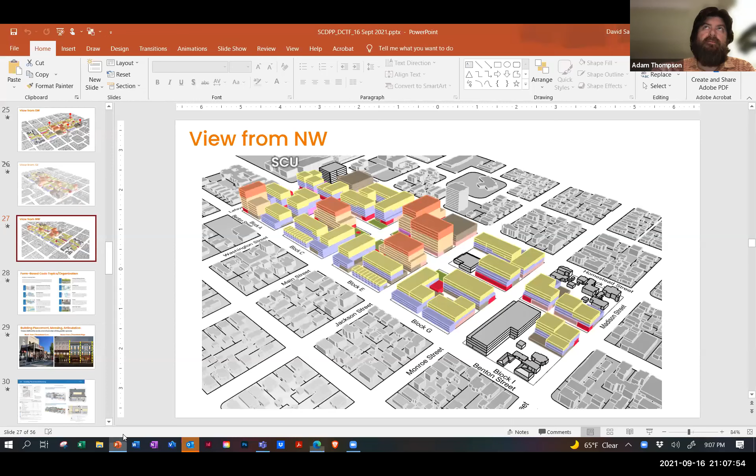The one thing I didn't see in your slide deck was any kind of parking. Is there anything that would dictate that? I like the idea of putting parking where it can either be converted at a later date if it's not needed, or demolished and something built in its place over the long term. So is there a mechanism that would allow us to do that in the form-based code, or push for that, or not really?

Well, we can talk about that. That's a very interesting question. Like for instance, if you're going to build a parking structure, I would want all parking decks to be level, not on ramps, so that they can be converted into housing later.

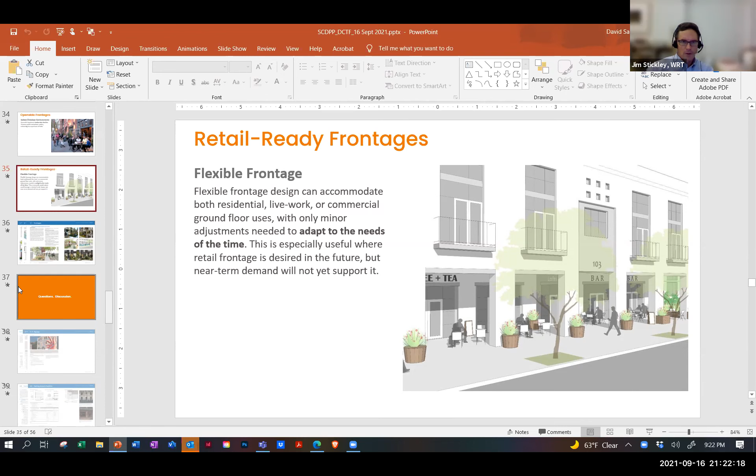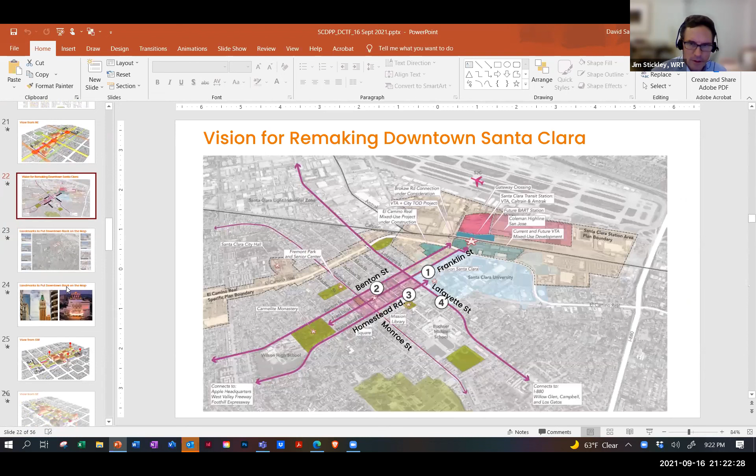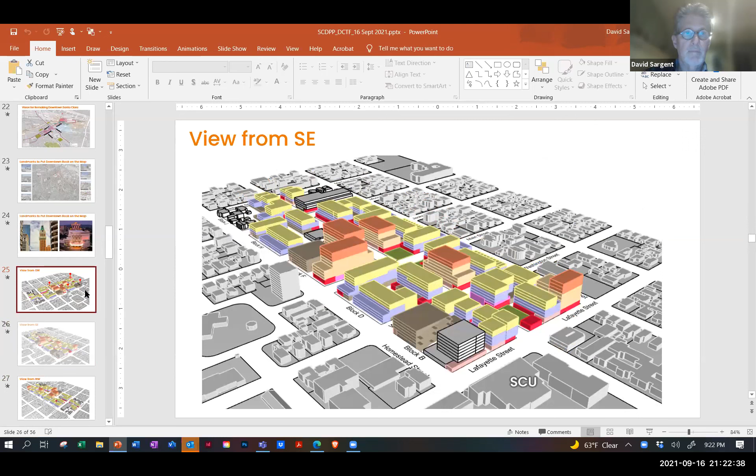Maybe I can just add a couple of words, Adam. David, if you wouldn't mind flipping to that one corner view that shows I and J. I think the spirit of what we've been working on here is one that honors the scale and character of these remaining houses, some of which are designated historic. We're sort of using historic as a blanket term here.

The comments I've heard tonight is that this is generally the right direction, that we want this plan to honor and value that scale. We want to incentivize those owners to retain that scale through density transfers and whatnot. So I think this is the direction we're going. How we do that has not been fleshed out, but I think that's also normal for this stage in the process. I think that can be fleshed out as we draft the language of the precise plan.

Additionally, I think that the attention to these infill buildings and how they step down in scale to the outer edges of the block is intended to honor scale and character. What I've also heard tonight is that we want to study this further, go deeper into how these incentives and protection mechanisms could work, and also look at a different form of infill on Franklin Street, on this back corner, maybe going to this live-work configuration, more of a townhome shape. So I think those are things we can study also.

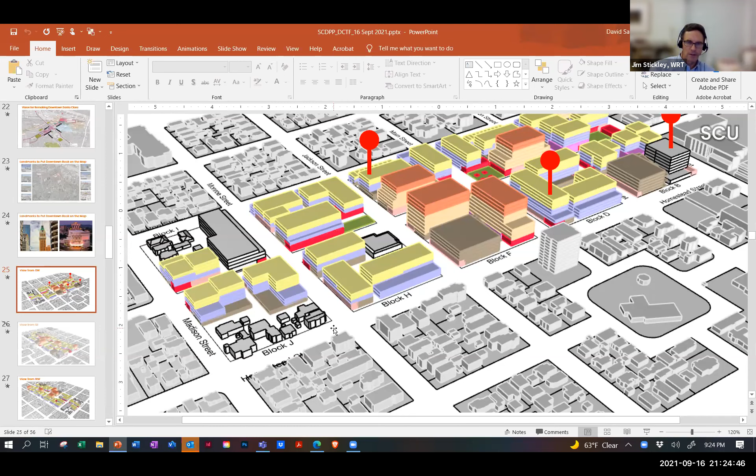It's up to Leslie and her team in terms of process and what we take to council. But I just wanted to comment that I don't see a big departure here from the direction the plan has been going, and I think we can continue to look at that more closely.

Jim, David, I guess a question that's kind of coming out of all this is, I think on the 28th—correct me if I'm wrong, Leslie or anybody—what you're looking to do is get the general approval from council based on the overall square footage and mix of product type in order to start the EIR process.

And building heights, it's the framework also. It's not just to start the EIR process, it's to start the process of actually writing the precise plan, which is not yet written. There's still time to put in these protections, and we can still adjust even the height. We can make minor adjustments as we continue on, right? It's not set in stone because it's not the final plan approval. It's the generalization and the direction we're headed.

That's correct. This is what's being taken to them, the overall intentions for the types of outcomes that the precise plan, when we write it, will be intended to generate. Which is why we show these buildings gray as existing, and they have development on them, right? So that's the general intention, but how you accomplish that through policy, regulations, processes, procedures, through specific zoning designations is all to be done in the near future. And has not yet been done at all.

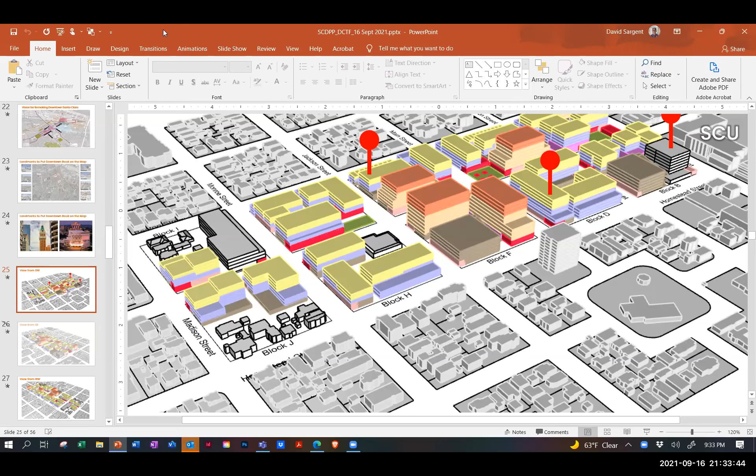So this plan is just showing how it could be accomplished. The garage could be on a different block or could be designed differently, or there could be more if they were necessary. Because we are doing a form-based code, the uses can move around within the blocks. But this is how we think the plan would possibly be realized, given all the research we've done thus far — and probably not taller. You couldn't, for example, take these two and stack them on top of each other. The general guideline is six levels is where you're maxing out above ground, because otherwise you're just endlessly driving around and around on ramps.

But if you do go six stories, you've got quite a view on the rooftop. Absolutely. Well, thank you, Skip.

Any additional hands from the public, or can we close public comment? All right, we're going to close public comment, so that will wrap up our public presentations. Is there a motion to adjourn the meeting of September 16th?